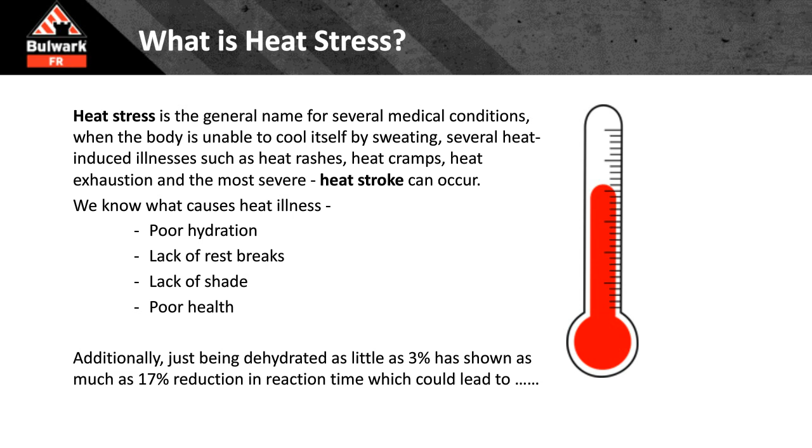For example, just losing as little as 3% of our fluid. And these studies primarily are done with athletics, so they can see performance dropping dramatically. We can see that in our occupational athletes. When you're under stress, and we're talking about environmental stress here, productivity and your abilities to react and do all the things you need to do your job can be hampered.

I live in the dry heat. My folks in South Texas and in Florida, you all live in the wet heat. Both are equally strenuous and equally difficult to tell. Well, in dry heat, you actually can stop sweating, which in your head you can misread your environment, misread your physiology because, hey, I'm okay, I'm not sweating or anything, I'm still perfectly dry, things must be good. In a humid environment, you are so moist you can't differentiate between what's the environmental moisture condition and what am I actually contributing to it.

So as you go through the workday and you use observational evaluation, both dry and wet heat can be misleading into how your body's reacting. That being said, there are common factors that we'll keep coming back to that can contribute to heat stress.

First and foremost, your age. Just like anything else, the better we get, the more experience we get, the more we do something. The older we get, the more experienced we get, our abilities to withstand stressors in the environment tend to get reduced. We may think we're 25, we may feel that we're still 25, but if we are 50, your body's going to react like it's 50.

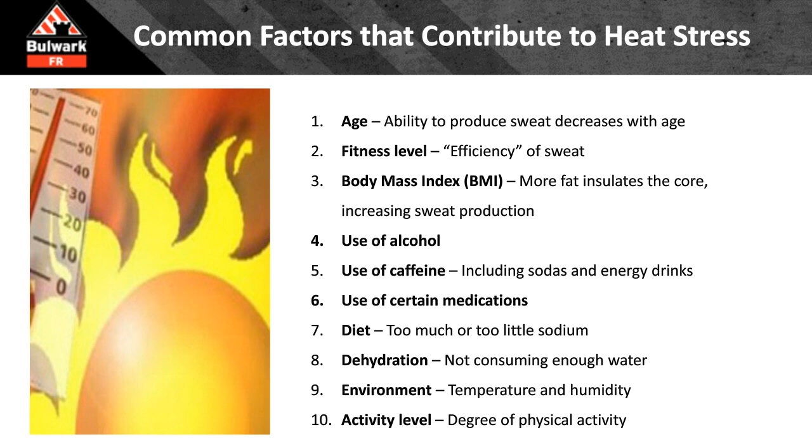Then we get into dehydration, environment, activity level. Notice that we're not even talking about clothing yet, and we're already 10 deep when we talk about environmental stressors. So there's a lot of things to take into place that most of us don't even think about. So as I said, types of heat-related illness. Heat-related illness and severity of that illness is driven by fluid loss. The more you lose, the more you accelerate into a difficult situation.

Heat rash, most of us see if we've ever worked outside for any extended period of time. Areas where moisture will accumulate, we'll start to see small rashes. As we continue to work, we might get some cramping in our fingers, cramping in the arch of our foot, cramping in our calves. Because we're moving and working around, that's your body telling you it's running out of stuff that keeps those muscles from cramping up. Electrolytes, fluids.

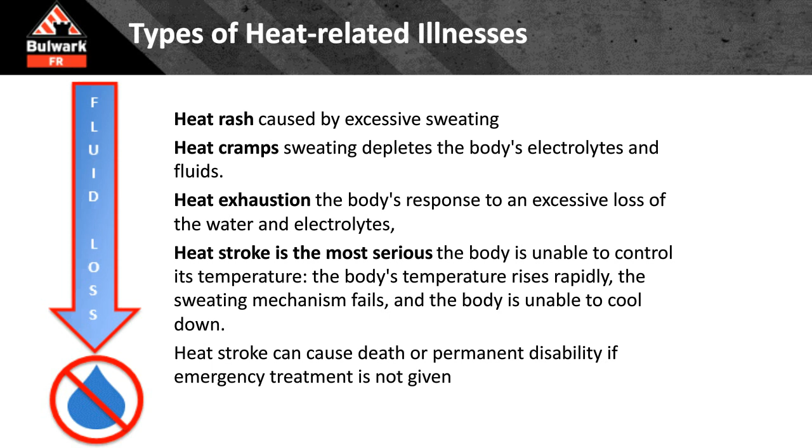And then as we move now, we're going into heat stroke, where we can't control our temperature at all. Worst case scenario is we look over at our colleague and they've stopped sweating. They're starting to get pale. We're starting to see their inability to cool down. All those things start coming into play where we're accelerating to worst case scenario, and that's where heat stroke and disability come in.

Our response to this, and what we need to train our people on anytime you're dealing with a hazard, is as that severity increases, as it escalates, we need to have a metered response. As we first talked about heat rashes, maybe a little bit of cramping, those are relatively easy. Stop working, get in the shade, start hydrating.

Hydrating with cool water to begin with, and better yet, cool water that has a little bit of electrolytes in it. There's a lot of good products on the marketplace today. Make sure that we're not doing anything. Carbonation's not great for you. Obviously, non-alcoholic, that's a no-brainer.

As it goes up further, now we're talking about if we're in isolated areas. Do we have an igloo cooler on the back of the truck? Do we have ice in that igloo cooler? Do we have the ability to make ice bags and start getting them in the armpits, the back of the neck, in the groin area? Then what's our 911 response? Because once we're into that precursor to heat stroke, we are definitely in a 911 situation, and we need to get people cooled down and, more importantly, into a medical facility.

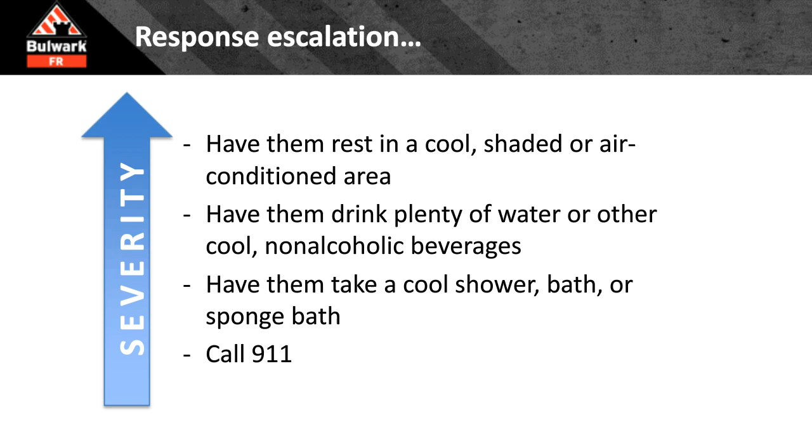Our body can do a lot of this work on its own if we properly supply it. There are 4 basic ways that we cool down. Radiation. Heat is radiated through the skin and absorbed by the cooler air. Remember, we're always going from hot to cold, so we're trying to get that heat off of our body. This is where fabric and what that fabric fiber complex is made up of can either hinder this process or it can help accelerate it.

Conduction, direct contact with cool objects. That's like taking that ice-cold bottle of water, holding it to our forehead, taking those ice-cold bottles of water, placing them under our armpits, placing them in and around our core. That is conduction. That'll help cool us down.

Convection, moving air. Again, now we're getting into that fiber fabric complex. What kind of open weave? What kind of structure does that fabric have to where it allows air to pass easily, or does it restrict air from moving through? Because if we can get some air permeability in there, that's going to help cool us down. And then really the last piece and the biggest piece is the evaporative cooling.

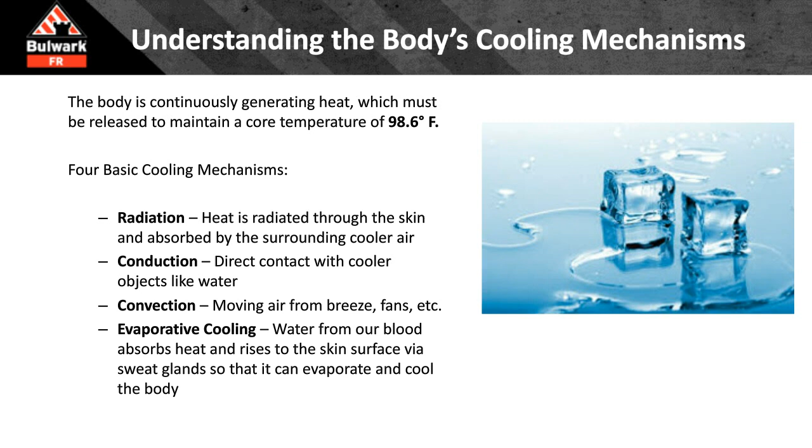That's what we all understand as our ability to sweat, our ability to move heat from our body, from our core that's heating up, and getting it through sweat into the environment and hence attempt to cool us down. The challenge is when the ambient air temperature gets over our body temperature. And what's that? Typically, it's 98.6 degrees. When your heat index or your ambient air temperature gets into triple digits, you are well above your body's core temperature. So all those mechanisms that we talked about are gone.

There's only one mechanism left, and that's your ability to sweat. That is fluid driven. That is a fluid balance. That's also an electrolyte balance. That's where once we get into those ambient air temperatures, whether our heat index tells us that's what it is or the actual thermometer is the real temperature, we need to be able to sweat. And once we run out of that capability, bad things start happening.

So how can fabrics, before we even start about flame resistant, how can fabrics assist in cooling? Asterisk to this slide. This is all in balance. Just one element in and of itself is not going to be enough. For example, I can make a lightweight garment, okay? But if that's all it is, it doesn't have an open weave, it doesn't have good air permeability, it's made with fibers that don't absorb and move moisture, then is it going to be ultimately assisting in me cooling down? Not necessarily. So we want to have a good combination of the three when we're evaluating fabrics for cooling.

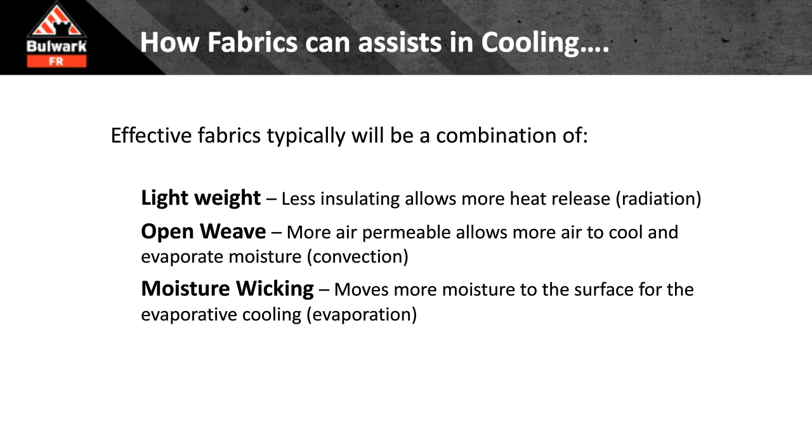Let's make sure that we have good open weave so that we balance that additional weight that we bring to bear to protect against a 10,000 degree arc flash shooting 1900 degree molten copper at me at 750 miles an hour. So we want to always have that balance as we get into the protection phase. So what do we recommend for workers in the heat? Make sure to protect exposed skin from direct and indirect heat.

That's a fancy way of saying, you know what, short sleeves may intuitively, or you may think, are going to be more comfortable, be better in a hot environment, but exposing that skin, we've known for a long time, to that big orange fireball in the sky, you actually get better by covering it up and reducing that radiant load.

So we want to make sure long sleeve, lightweight, all your additional gear, boots, gloves, etc. Make sure there's some lightweight properties to it. Take that load off. Head protection should be appropriate. Get shades in there for our utility guys. When we build our shades for our hard hats, when we take our hard hats with the wide brims, make sure that those shades have some FR properties, that they will self-extinguish, not melt, drip, add to the injury, etc.

In cool locations during work breaks, limit the amount of time that you're outside during these heavy loads of heat. My APS, SRP, and TEP guys here in Arizona, you don't see them in buckets at noon unless it's absolutely emergency conditions. They're managing their work hours in the morning. They're managing their work hours into the evening. Even though it's still 105 degrees out, when that sun starts to go towards the horizon and that direct radiation is not there, it's actually tolerable and you're able to get work done.

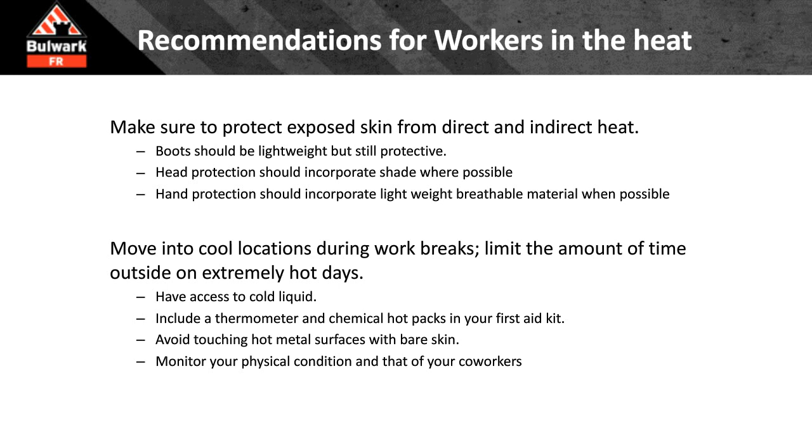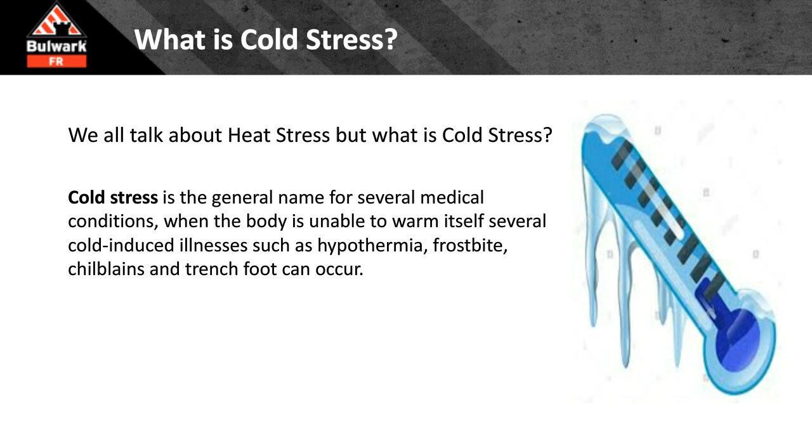Transferring into the other side of the coin, so what is cold stress? Just like heat stress, it's a general name for several medical conditions. It's when the body is unable to warm itself. We can get hypothermia, frostbite, chilblains, trench foot as byproducts of those. It's a measurable condition, as is heat stress. It's actually several cold-induced illnesses that we talked about. What's the primary? Lack of warmth. This is clothing. This is your insulator.

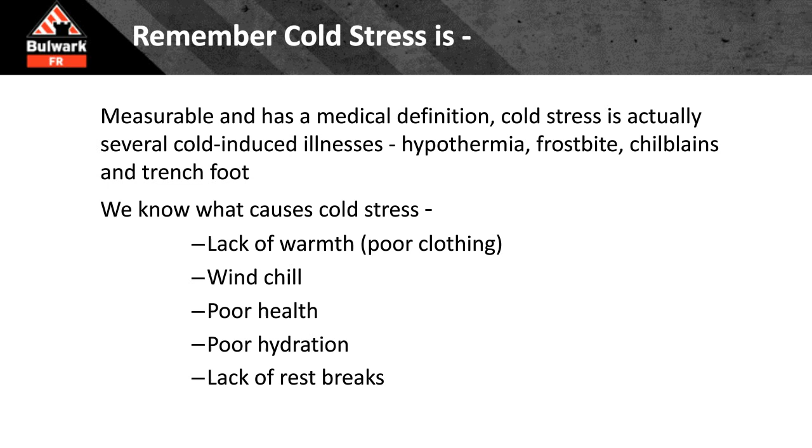Wind can dramatically change something. Even in 50 degrees ambient air temperature with a light rain, and all of a sudden I get a cool wind whipping up off the lake, something that would seem not conducive to cold stress can become cold stress because I get wet, the wind is blowing, I don't have my proper gear with me, and now I'm starting to get cold. I might even start shivering. My teeth might start chattering. Those are all indicators that cold stress is occurring. And as with heat stress, poor health, poor hydration, lack of rest breaks in warm areas are only going to accelerate those things.

So what's happening in cold stress? Well, your metabolism, your body, again, is trying to stay where? At 98.6 degrees. Where before it was shedding heat, now that furnace, that metabolic rate, is starting to accelerate to try and stay warm. The caloric output in cold environments is almost twice as much as it is in regular everyday walking around at 75 degrees. The caloric consumption needed to stay at that core temperature can be 2 to 3 times the normal intake, because that furnace is working on high.

In hot environments, the body, as I said, needs to release heat. We want to lessen the amount of clothing that we have to a certain degree. We want to lower our activity levels to a certain degree, and we want to be able to sweat. In cold environments, it's almost the inverse. We want to pile clothing on us because that's the insulative component. We want each of those layers to be specialized because we're occupational athletes. We're not just trying to get down the street. We're actually trying to do something during a day.

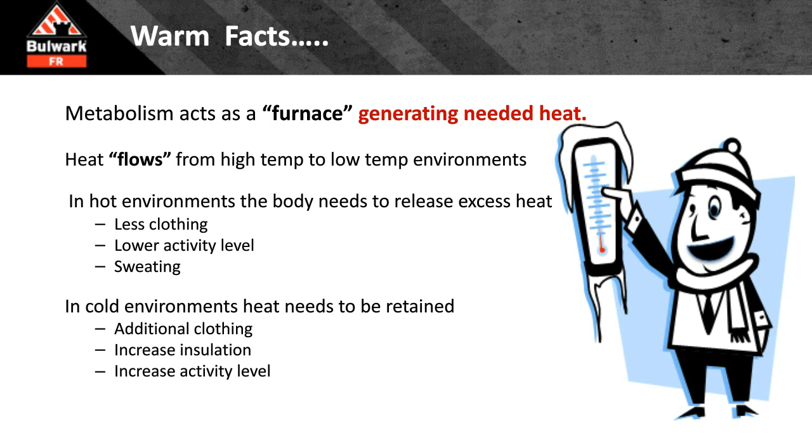We need to increase that insulation, and we may want to also, as we begin to sweat, decrease that activity level, because the last thing we want to do in cold environments is have our workload and our insulation be out of balance so that we actually start sweating, because that will ultimately make ourselves colder, and we will accelerate the cold stress.

How cold is too cold? Just like how hot is too hot. If you're acclimated, it can be very different than if you're unacclimated. Take any extreme environment and the people who live in that environment on a day-to-day, year-to-year basis. If it's February in Minot, North Dakota, and it's minus, pick a number, and I live there year-round, yeah, it's going to be cold, but I'm going to be a lot more acclimated to that versus someone like myself who relocates from Arizona and walks into that temperature. Completely different. Take the inverse.

Take someone who comes from a colder region, bring them to my desert in July, and try to make them work outside for an 8-hour workday. That is not going to go very well. So acclimation to these extremes is key.

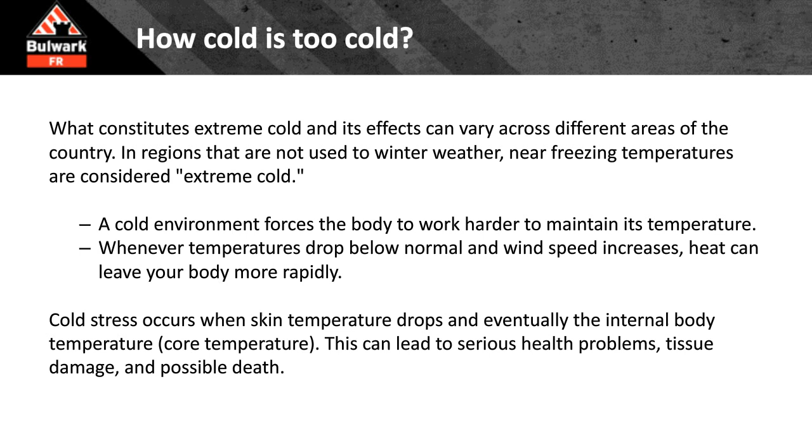In fact, most of the studies today will tell you that acclimation to extreme temperatures is the strongest predictor of success if we do that incrementally. 2 hours, 4 hours, 6 hours, working our way up to that 8-hour workday or 10-hour workday, whatever you have, taking into account all the other balances that we have in there, working in the extremes, that's going to be more beneficial than just dropping someone in and expecting them to be able to work.

So as we said, how does your body react to cold conditions? Over time, your body is looking to shift its blood flow to the important parts. That is your core, your heart, your lungs, your liver, your kidneys. That is where all the heat and all the blood is going to flow to, because your body's going into survival mode. What does that do? That takes blood flow away from fingers, toes, arms, legs, and in a relatively short period of time, you will lose functionality in those areas because your body has just gone into survival mode.

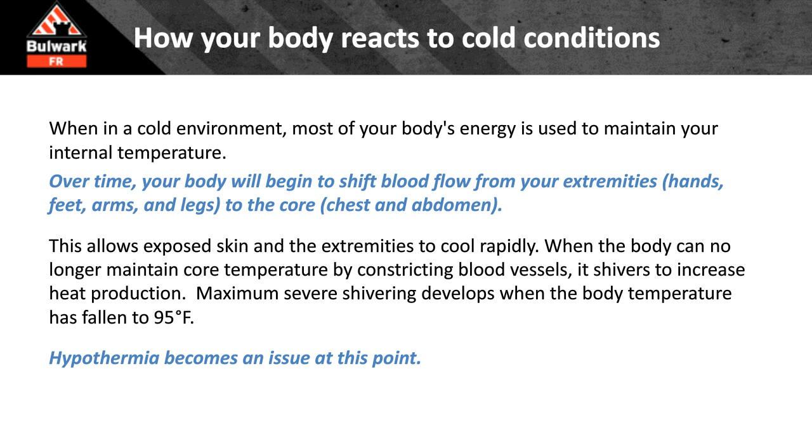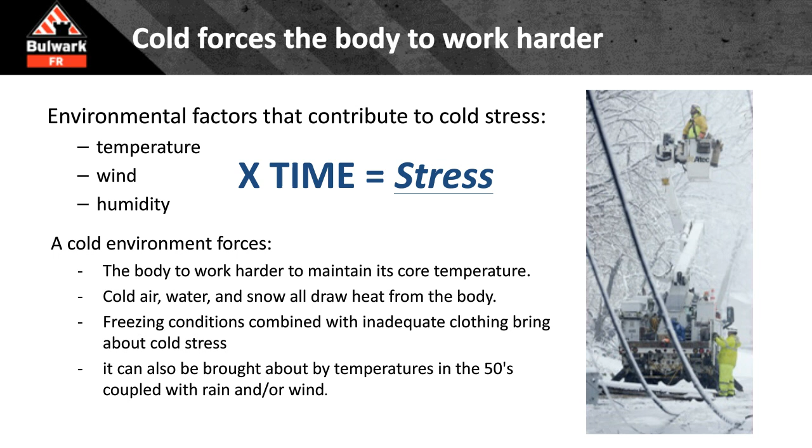Even losing as little as about 3.5 degrees will put you in a hypothermic state, which ultimately, as in heat stroke, can lead to fatality. Environmental factors, as they change over time, do not take a lot to put you into stress. As temperature drops, as wind increases, humidity, precipitation, light snow, heavy snow, drizzle, rain, freezing rain, in time is going to equal stress. The body is going to be working harder and harder to maintain that core temperature. And those freezing conditions combined with inadequate clothing or inadequate ability to heat up is ultimately what's going to drive things from bad to worse.

So what's the challenge in the cold? When the ambient temperature is well below your body temperature, insulation from clothing is absolutely necessary and vital. How healthy you are, how fit you are, is going to determine how you perspire while you're working, because we don't want to overheat and we don't want to perspire. When clothing becomes wet, we're now adding to that potential stressor. And we've also got to remember that once our workload is reduced, as we're coming to the end of the day, we've got to be conscious and manage that.

Think of starting the day early in the morning. I've got a jacket, I've got a sweatshirt, and in between those, I've got a fleece. So as we work through the day, as the temperature rises, and that temperature will be relative, it goes from -20 to -5. My workload is increasing. I've got to be able to doff those layers because I want to stay neutral. I don't want to be working so hard and be so insulated that I sweat, and I don't want to be so uninsulated that I start to get cold. So as we're working through the day from a clothing standpoint, we have to manage our insulation and our workload.

Because just like in heat, our body heat is lost through conduction. The cold is outside and I'm warm, and my heat is going to travel from hot to cold, and the barrier in there is what I'm wearing. It's going to be whatever my base layer is, my work shirt, my fleece, my outer layer that also has some water repellence or water resistance because it's withstanding light snow, possible rain, freezing rain, sleet, etc. So there's going to be a barrier component there.

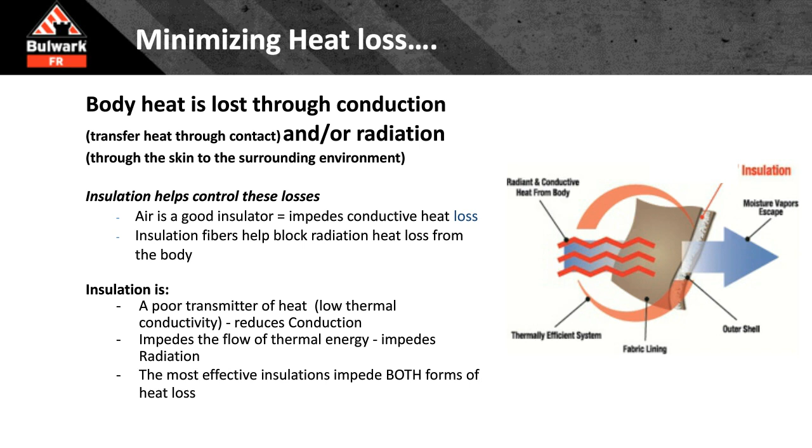Well, if I'm working to such a point that that radiant heat can't get outside, it's going to cause me to sweat. I don't want that. So I'm going to doff those outer layers. And in a non-FR environment, that's completely fine. There's very little thought process that goes into what's the protection of the next layer, and the layer after that, and so in a non-FR, non-thermal hazard world of arc flash and flash fire, we're just dealing with the insulative components to preventing heat stress.

So as we look to prevent cold stress, know what the symptoms are. Monitor your physical conditions. Dress properly for the cold. Stay dry in the cold. Keep extra clothing. Why? If you get wet, if you sweat, let's have something to change into. Here we want to have warm, sweet liquids. Why? Remember that caloric output we're putting in there, that metabolic raise that we're getting in the cold?

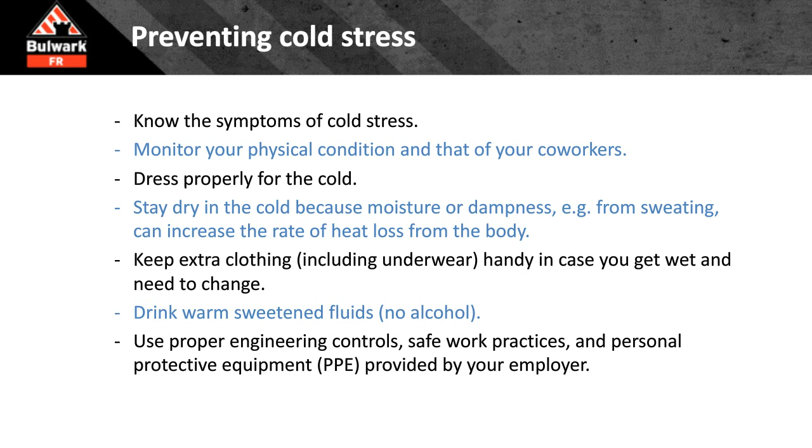We want to have some calories when we're rehydrating. We want to have those electrolytes in there when we're rehydrating. And then obviously look to have some place where we can also rest and we can warm up, whether that's the cab of the truck with the heater on, or it's heating huts, out of the elements. We've got some place to stay warm.

So layering in cold environments provides better insulation. That outer layer that we talked about against wind and precipitation, that middle layer of wool or fleece, etc., and then an inner layer of synthetics that help keep the moisture off of your body. You want it to have great moisture vapor transfer. You want it to be absorbent and be able to move any moisture that you're creating away from you.

Obviously, hats and hoods to reduce the amount of heat coming off your head, balaclavas, all those things, insulated gloves, waterproof boots, everything in here that we're talking about is going to have that insulative component. The acronym COLD is great. Cover. Don't overexert. Dress in layers. And with all possibilities, stay as dry as you can.

Equip yourself to beat the cold. Base layers, balaclavas, skull caps, watch caps, mid layers of fleece or wool, smart wool shirts and socks, pocket warmers, insulative gloves. Those all sound great. Now, here's the challenge. Everything that we've talked about here in a non-thermal hazard, relatively easy to do. The training on this, very common sense. If you've grown up in that environment, you have been doing these things since you were able to walk and you were first tobogganing down the slopes back in the day.

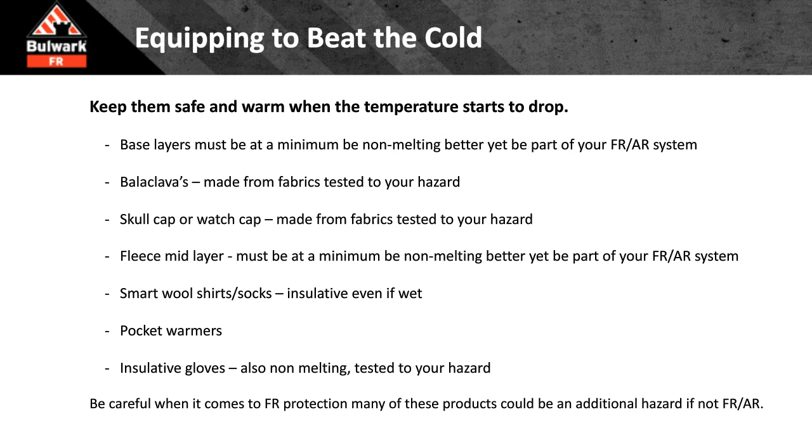The challenge now becomes when we go into the environment's a hazard, and now we're still dealing with our short duration thermal hazards of arc flash and flash fire, because everything that we talked about here has to have a flame resistant arc rated component. Employers have to recognize that we have a heat hazard and a cold hazard, plus they've also recognized that we're outfitting you with flame resistant arc rated clothing because we have thermal hazards.

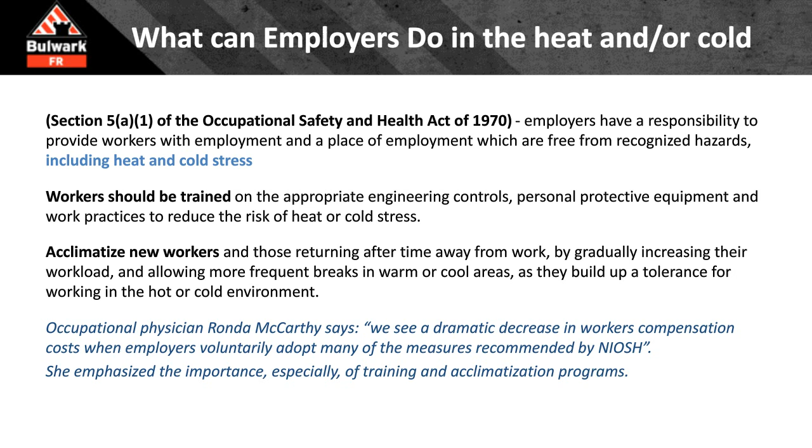So as employers are going through their hazard risk assessment, they're looking to include information and training for risk prevention, what kind of symptoms to look for, be your brother and sister's keeper, the importance of monitoring yourself and your coworkers, what treatments are available in the immediate term, and then where we're calling for additional medical assistance, and then how does PPE factor in to all of the above.

Employers can take the following steps. We can start looking at administrative controls in that hierarchy of safety. Schedule maintenance and repair jobs when temperatures are not as severe. Schedule jobs for cooler or warmer parts of the day depending on what the environmental stressor is. Reduce the physical demands of the workers. Have more people there to get some of that load off. Use relief workers. Assign extra workers. All these things sound common sense, and there may be resistance just from stating the fact we need more people to do the same job when things get extreme.

Provide warm and cool areas during breaks. Get out of the heat, get into shade, better yet, get into cool. Get out of the cold, get into heat, do what you can, and then monitor for the symptoms as you go forward. Avoid exposure to extreme hot and cold. When hot and cold environments or temperatures can't be avoided because of emergency situations, make sure you know what to do to protect yourself. Clothing, layering, whether it's hot or cold, layering can be beneficial.

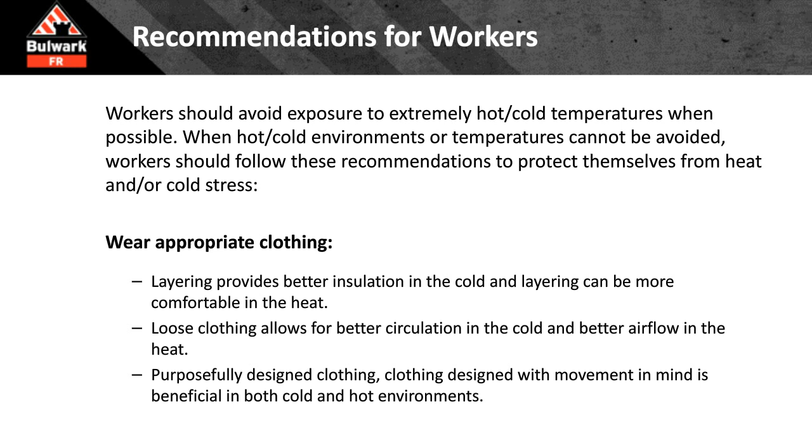Loose clothing, air is an insulator. All right, loose clothing also helps in that convection, the moving of hot to cold. Purposefully designed clothing designed with your movement in mind and beneficial for both environments. Because why? Everything that we're hearing about, whether it's the American Meteorological Society, NASA, all the top agencies are telling us what? Extremes are only going to be getting worse.

Exposure to heat on average kills about 800 U.S. workers a year. Hypothermia and extreme cold conditions, about 1,600 people are affected every year. Of those, about 23%, or roughly 400 workers a year, so almost 1,200 succumb to the extremes in temperature, both in the hot and the cold. So what resources are available out there for us to look at and utilize?

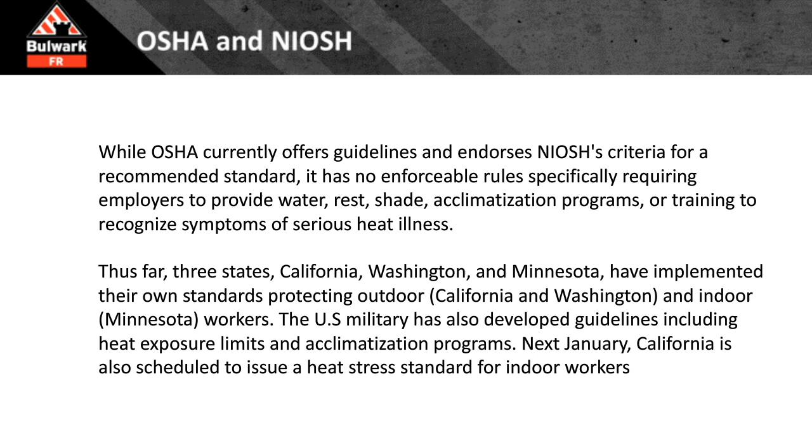As I said, NIOSH does a lot of the research in and for OSHA, and even though we only are seeing guidelines coming from OSHA, there are some states out there, California, Washington, Minnesota, and others are coming on a regular basis, who are putting in regulations in and around both heat stress and cold stress. Both of them respond similarly, both NIOSH instructing OSHA and OSHA stating it to us.

Whenever possible, wear loose-fitting, light-colored clothing for heat, loose-fitting for good airflow and movement of sweat. Notice that they say light, not lightweight. That's light in color for heat stress. Obviously, khaki versus a navy, you're minimizing or looking to reduce the absorption and that fabric holding heat. Weight in and of itself as a single factor in breathable single layer garments is scientifically not a factor.

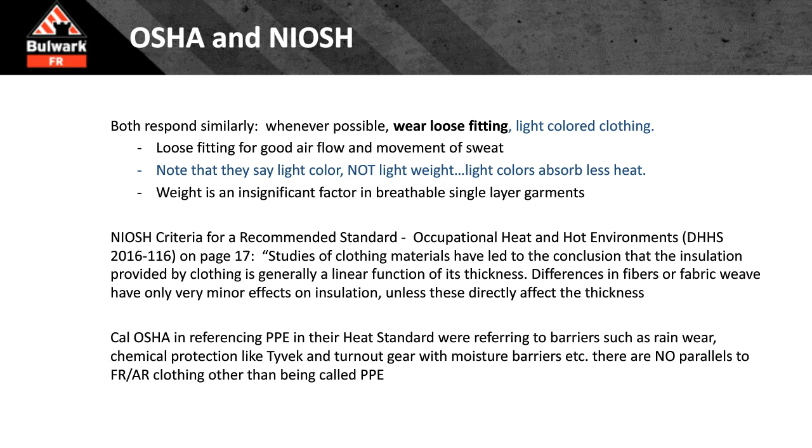A 7-ounce cotton work shirt, a 7-ounce FR cotton work shirt, a 7-ounce 88/12, a 7-ounce, 5.5, they're all going to, as far as physically and physiologically, have the same effect on us as the wearer. So in and of itself, FR and non-FR is not a contributor towards heat stress. If you go to the OSHA website, they've got some really good resources for you to utilize in protecting your workers from heat stress.

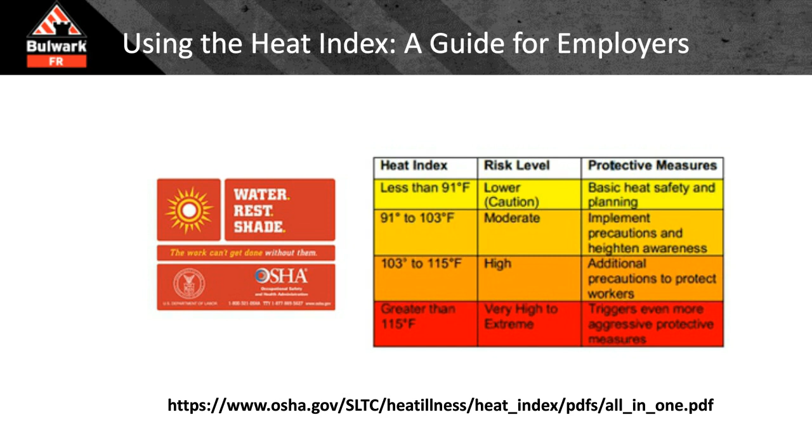Water, rest, and shade, that is the go-to. WRS, that is what OSHA has been preaching for years. Simplifying, understanding the heat index and what the risk levels are and what you should do for protective measures. They walk you through that. So get on OSHA.gov, use the resources that are available. They walk you through the difference between heat exhaustion and how it leads to heat stroke, when one is manageable and one becomes an emergency. Train your people on that.

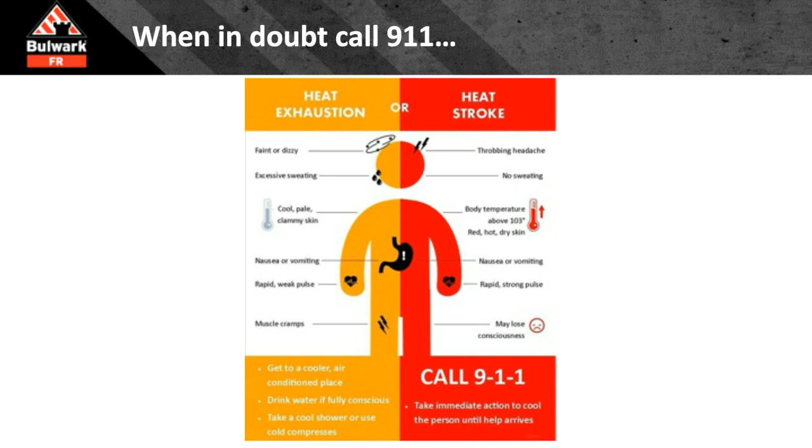So in the last couple of minutes here, this is kind of the payoff, where, man, FR guy's been talking now for 40 minutes, and he hasn't really talked a whole lot about FR clothing and what I need to bring to bear with my teams who are exposed to arc flash and flash fire hazards. So first and foremost, and I alluded to it earlier, heat stress and FR clothing. Be very, very cautious of marketing terms. Lightweight and comfortable are subjective; comfort is completely subjective.

If you don't believe me, next time y'all have a team meeting, take a look around the room. Look at the faces looking back at you and look how they're dressed. You'll have a hoodie over top of a t-shirt. You'll have t-shirt only. You'll have polo only. You'll have polo and lightweight jacket. You'll have every variety of single layer clothing in that room, and I would argue the reason they're wearing it is because they're comfortable. So the point is fabric weight, fabric style, fabric thickness, fabric anything has very, very little to do with it.

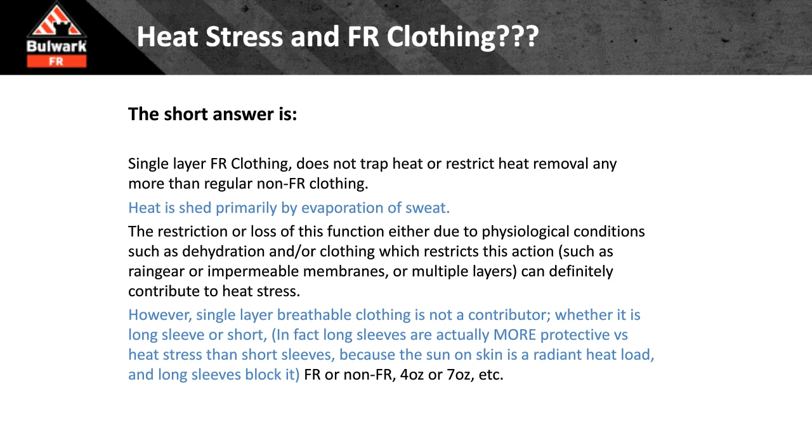Wear test, wear test, wear test. And if you have a hot environment, wear it in the hot environment. Don't test a single layer new shirt in January when you're looking to implement that in July, and vice versa for cold stress. We're looking at threshold limit values here in what's called a clothing correction.

If I have to climb into an arc flash suit to do my job, yes, I need to monitor myself, because in hot environments, I'm going to have about 10 or 15 minutes of work in that layered system. If I'm working in a refinery outside and there's a chem release and I'm in my flame-resistant, chem-resistant Tychem coverall, I am going to have a certain amount of time to do my job versus just wearing my single-layer coverall and or shirt or pant.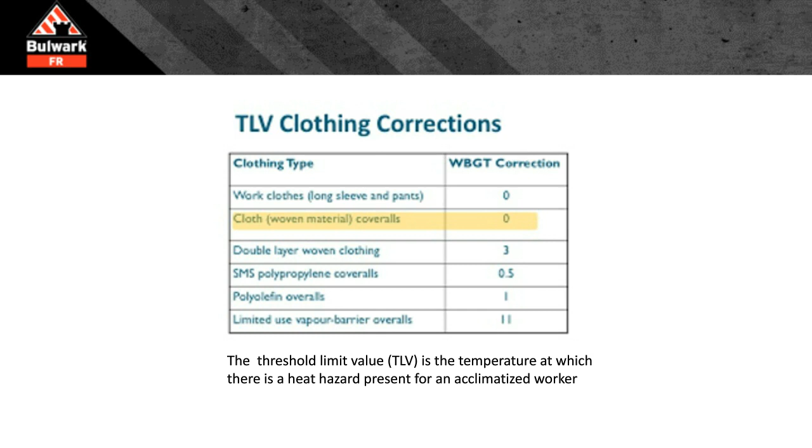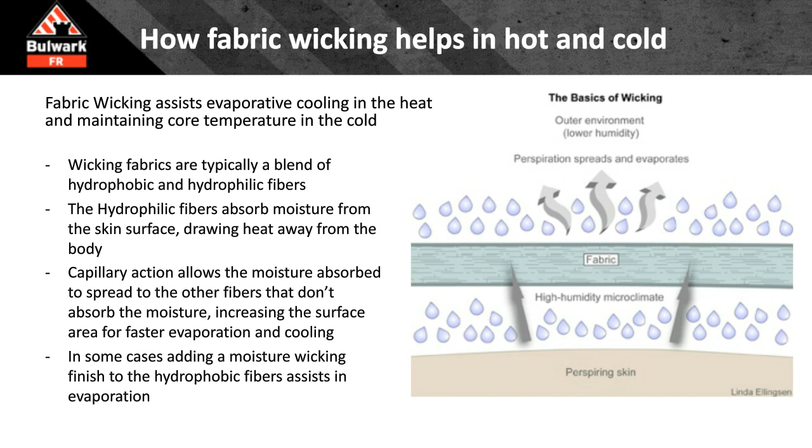Why? Because fabric works in a single layer to help keep you hot and cold. It's an insulative barrier. It removes perspiration, so in cold environments, it keeps you warm. And in hot environments, it's actually assisting the body's natural cooling mechanism, which is sweat. So when FR clothing is also your PPE, remember, in that cold environment I talked to you about base layers, work layer, our wool and or fleece layer, and then our outer layer, which has some water-resistant capabilities.

So what happens in my workday as the environment gets hotter, my workload's increasing, and I want to doff these layers? You have to, and this is key, make sure whatever layer you're dressing down to has to be equal to or greater than the hazard that you're in. If you're in a flash fire hazard, every single layer has to be NFPA 2112. If you're in an arc flash hazard, you need to know the incident energy, and every subsequent layer down to the final layer you're working in has to be equal to or greater than the incident energy you're facing.

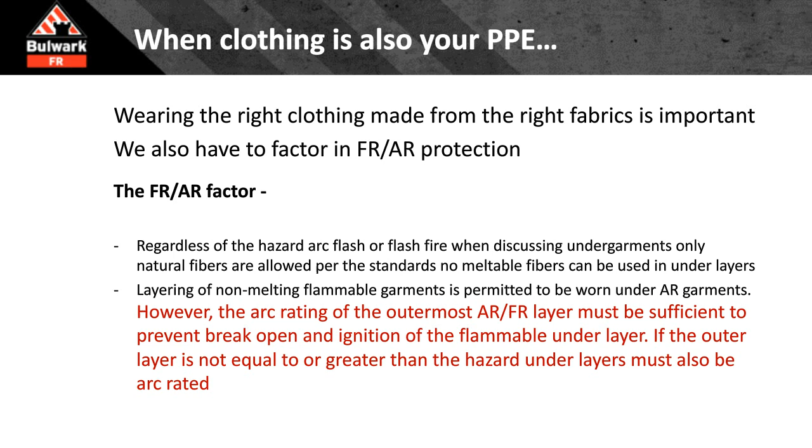So it is key, as you are factoring in Mother Nature as a hazard and your existing thermal hazards, that whatever outer layer is exposed, as all your standards tell you, has to be equal to or greater than the hazard it's exposed to. That's a huge challenge, because we're managing all those capabilities in order to be efficient in an environmental stressor, plus we have to balance that with everything else. So how do we find the balance?

Believe it or not, today we are at a junction in time where FR is beginning to mirror our other performance fabrics. We are looking at the occupational athlete the same way we look at the recreational and professional athlete, bringing a lot of that discovery to bear and making sure that first and foremost it has FR properties. What are those? It puts itself out, does not melt, drip, and add to the injury. And for arc flash, we do additional testing to show it will insulate you in those hazards.

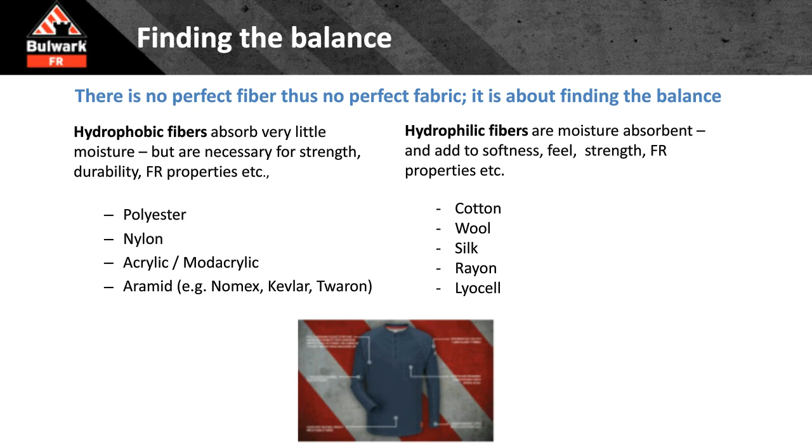So bottom line, hydration, rest, shade, cover, all those things are control methods. Make sure we're implementing those. Schedule your heavy work during the warmer or cooler parts of the day. Have them rest in warming or cooling tents, depending on the environment. Dress in layers, both in the hot and the cold. Two lightweight layers in the heat with moisture wicking capabilities can be cooler than one heavier layer, plus you get the additional benefit in the arc flash hazard and additional protection in flash fire hazards.

Protect against the wind, get out of damp and wet clothing, acclimate your people, and having a strong acclimation program is definitely going to be beneficial. And from an FR protection standpoint, make sure you're consulting with proven subject matter experts who can help evaluate so we don't miss something when we're layering and adding more variables. And then lastly, wear trial, wear trial, wear trial.

Any of the top folks today will be more than happy to walk you through a very measured and guided wear trial so that you get the best out of your investment.